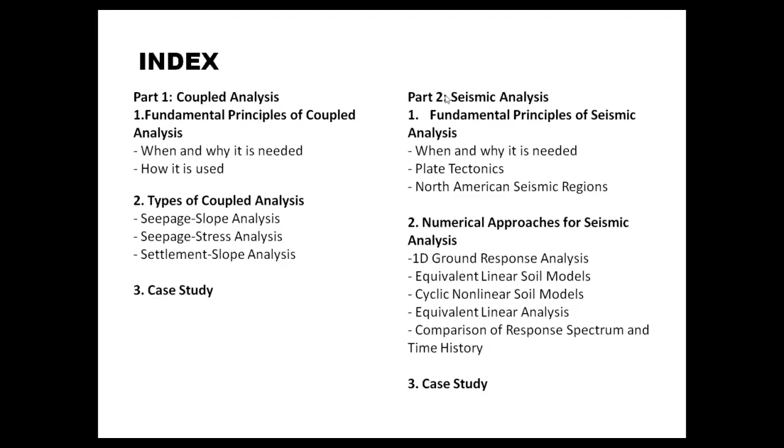In part two, we'll go over approaches for seismic analysis and different methodologies or design approaches that exist for seismic analysis today. This session is a little different from our previous sessions, divided into two main parts. The first part is shorter and covers specifically coupled analysis, and part two covers seismic analysis in detail.

As for part one, here are the main bullet points. I'll give you a basic introduction to the concepts and fundamental principles of coupled analysis, go over various types of coupled analysis that are out there, and then for the last two sections, cover numerical approaches as well as case studies or certain projects that have been done with coupled analysis.

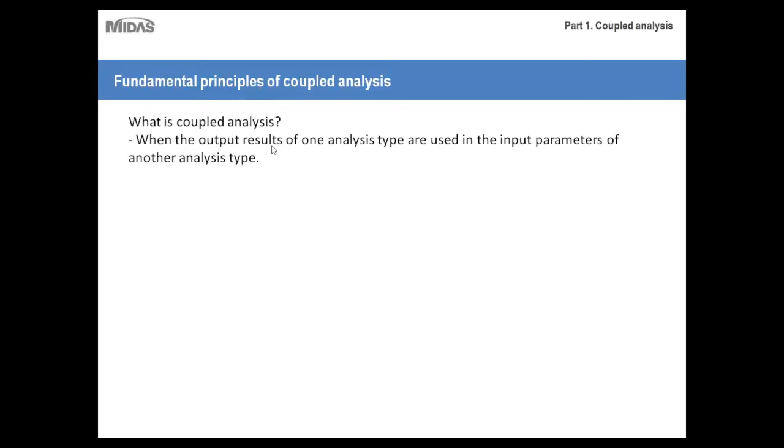So first, what is coupled analysis? Essentially, it's when the output results of one analysis type are used in the input parameters of another analysis type. To give further clarity, it's used for analysis types whose data is analytically interrelated. In other words, the output for one analysis type depends on the results of a previous analysis. I'll go into greater detail about this through some specific examples.

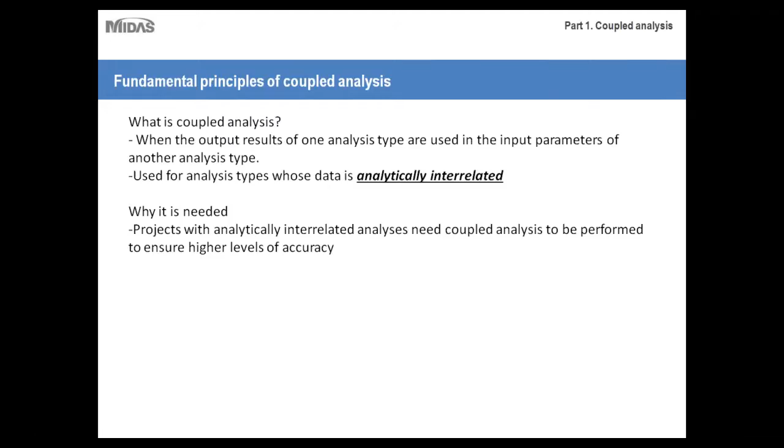So why exactly is it needed? Projects that have analytically interrelated analyses need coupled analysis to be performed to ensure higher levels of accuracy. In other words, there are certain projects that have analysis types that are interrelated. In order to gain fully accurate results, they can't be analyzed independently—they have to be linked together through coupled analysis.

Also, coupled analysis can contribute to designs that are more cost-effective while still meeting necessary design codes. As you all know, the greater your accuracy as far as your design parameters, the more effective you'll be able to design your projects or structures, which in turn can lead to savings in cost as well as still meeting the necessary design codes.

Here's the basic procedure for a coupled analysis. First, you have one analysis type and it's performed. Afterwards, the results from that analysis are imported into the input parameters of the second analysis. Then the second analysis is performed while taking into consideration the calculations produced from the first analysis. So it's a fairly simple process—really a three-step process.

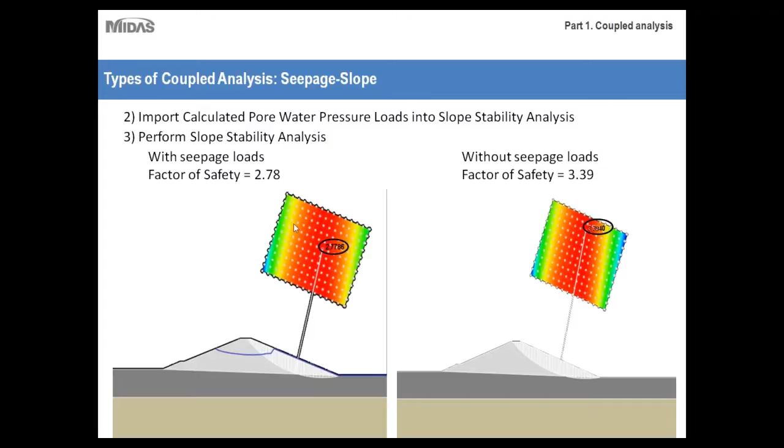Here's another example of our coupled analysis. This would be a seepage stress analysis. Essentially, a seepage stress analysis is first a seepage analysis to analyze the effects of pore water pressure, followed by a stress analysis to analyze the effects of that pore water pressure.

This time instead of a slope, it would be, in this case, an excavation, a retaining wall, a pile foundation, those sorts of structure types.

I'm sure you're all familiar with this equation: effective stress equals the normal stress minus the pore water pressure, and the pore water pressure is calculated just through this simple equation—the height of the water multiplied by the gamma of the water.

But essentially, that's very simple to calculate with smaller scale type projects. As you get into larger scale projects with more complex geometry, coupled analysis becomes more prevalent. It takes a longer process to do, and that in turn makes numerical modeling more prevalent as well.

First, the seepage analysis is done to analyze this flow. Then afterwards, those pore water pressures are imported directly into your soil stress analysis, which in turn would help you to analyze not only your regular stress but your effective stress.

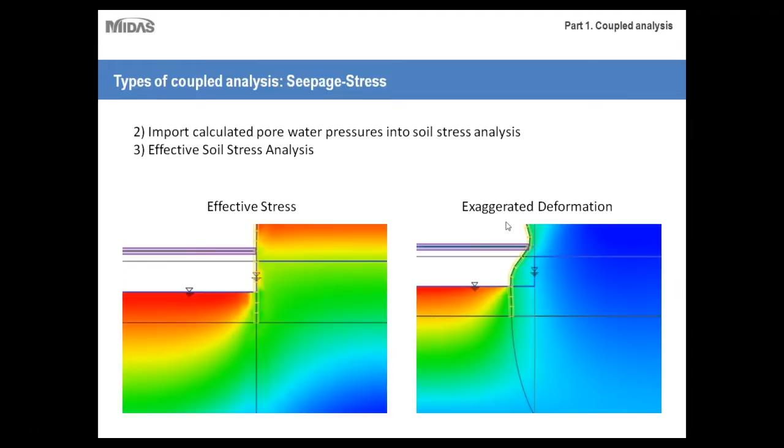As you can see, the effective stresses are clearly shown here, as well as an exaggerated deformation. This is something that the engineer did so that he could get a better view of how that retaining wall would deform and maybe which points would be of most concern to him or her.

Now let's talk about settlement slope analysis. Essentially, the first thing that we need to discuss is just the basic principles of settlement.

I'm sure you're all familiar with consolidation, but just as a recap, essentially what consolidation is: when, for example, you have a clayey soil that's subjected to a certain amount of weight, because the pores in clayey soil are so small, water takes a long time to escape from those pores when weight is pressed upon it. Depending on how resilient or how tightly compacted your clay is, this could take any number of days or even months.

That's another key thing to keep in mind: when clay is consolidated, first it compacts, so there's displacement, and second, the overall strength is increased. Because of these factors, this could affect certain analyses you may need to run for the structure itself, as well as, for example, a slope stability type analysis, which we'll be discussing here.

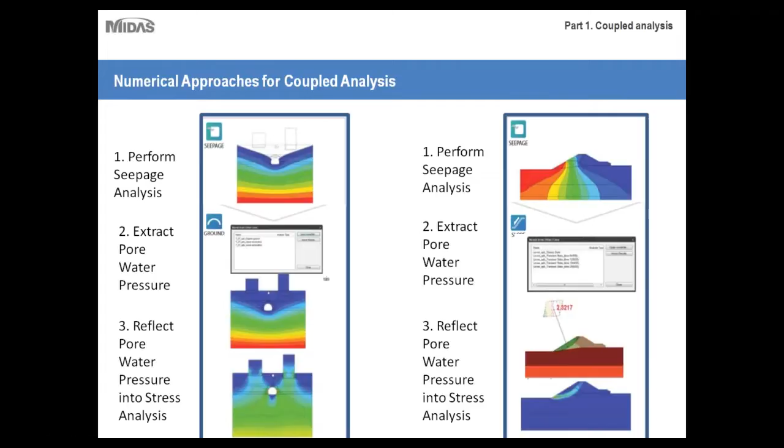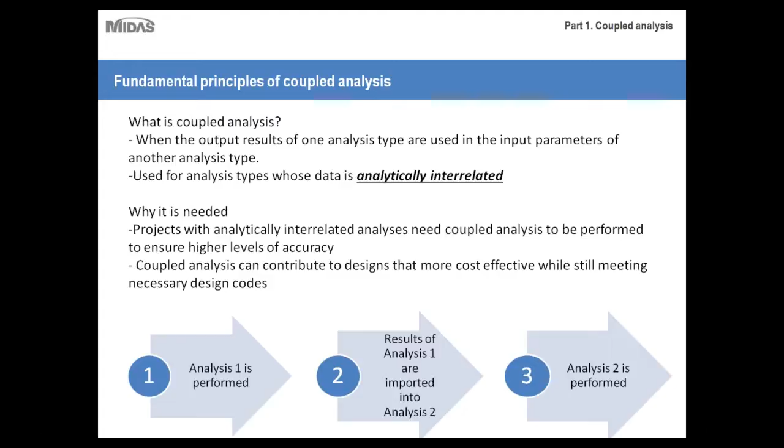Just as a review, keep in mind that coupled analysis is used for analysis types whose analyses are interrelated or analytically interrelated. You need one analysis to be performed before you can successfully or accurately run the other.

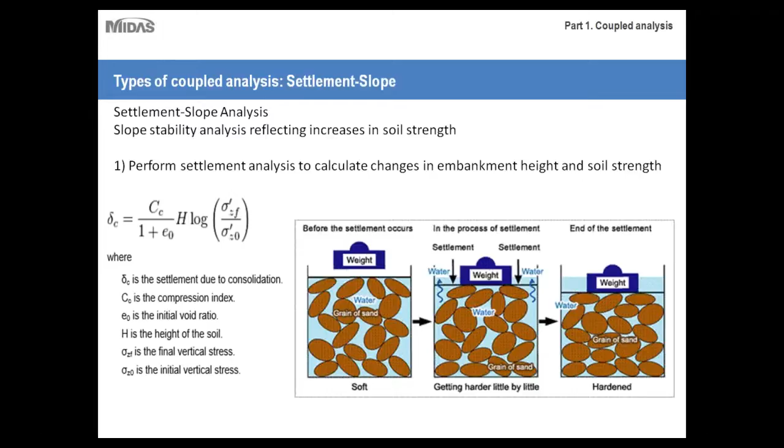As I'm sure you've noticed, coupled analysis is typically used in tandem with seepage and another analysis type, because pore water pressure can have a very strong, critical effect on your project. So pore water pressure loads would have to be calculated through a separate seepage analysis, and then those results would be imported into your following analysis type.

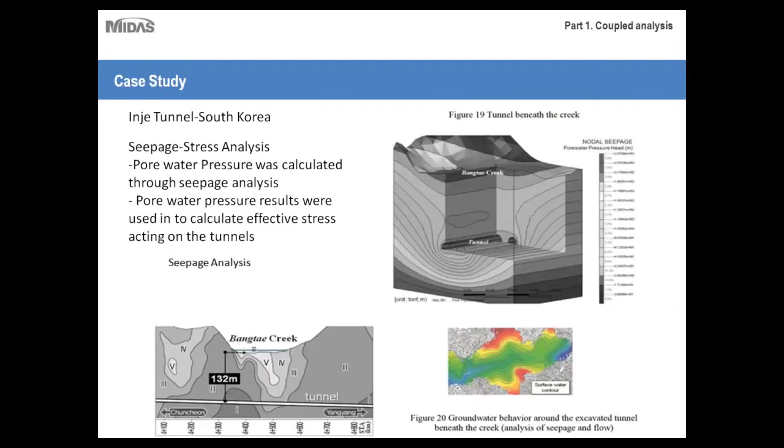Moving on, now we're on to part 2, which will be specifically on seismic analysis. Here I'll go over the very fundamental or basic principles of seismic analysis, numerical approaches for it, as well as a case study.

So first, why is seismic analysis needed? First and foremost, it's a major aspect of structural analysis for high seismic regions, regions such as California, Hawaii, Alaska, etc. Seismic loading patterns are highly concentrated and cyclical, meaning they vary depending on time. Therefore, they cannot be analyzed with numerical approaches used for typical live loads.

The main concept to get from that is that seismic analysis is very unique, and it requires a very special set of calculations in order to effectively consider it in your design. We'll be going over those methodologies shortly.

So why is numerical modeling needed specifically for seismic analysis? Even the simplest seismic analysis methods require consideration of extensive amounts of variables. Because seismic analysis is time dependent, it's cyclical, and it varies very sharply over a very short period of time, a large number of variables needs to be considered to account for that. That's why numerical modeling especially becomes more effective for it, because it can take all those variables and run the calculations much more efficiently than possible by hand in spreadsheets.

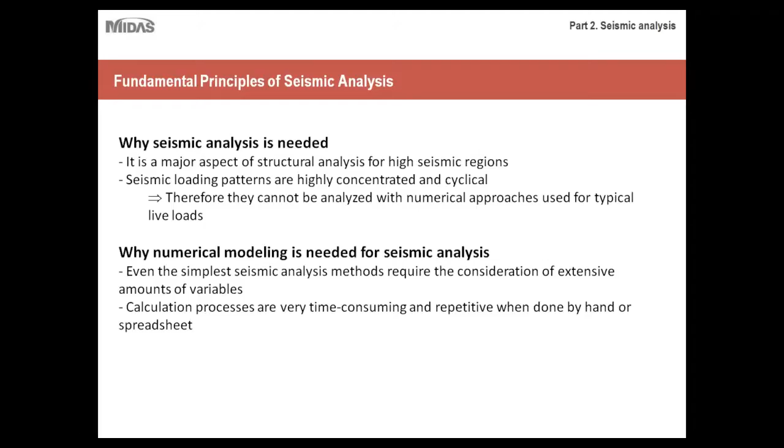As you can see, calculation processes are very time-consuming and repetitive when done by hand or by spreadsheet. So essentially, numerical modeling would help you cut out a lot of legwork as far as seismic analysis. And last but not least, finite element analysis or finite element modeling allows for more accurate and efficient modeling, especially for larger scale projects that require advanced seismic analysis methods.

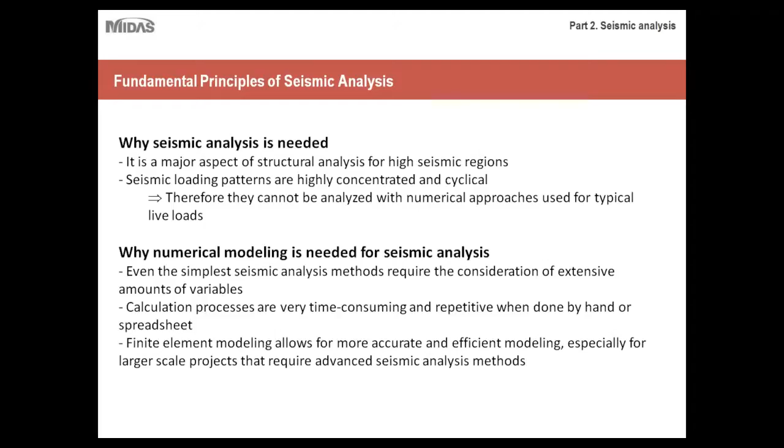So we'll be going over several different analysis methods, but just keep in mind that for larger scale projects in high seismic zones, that have more variables to be taken into account, they require a very high level of seismic analysis, which can only realistically be done through a numerical modeling program. Okay, so before I go too much into detail about seismic analysis itself, first let's talk about the principle of plate tectonics.

So there's the soil layer that we work in as geotechnical engineers, the continental crust. But below that layer, there's the lithosphere, which is very hard rock. Keep in mind that the Earth's surface is made up of several of these large plates. And below the lithosphere, there's a level called the asthenosphere, which is essentially a liquid magma or viscous type material. It's very hot, and what happens is the lithosphere, which is solid, slides along the asthenosphere.

And because these large plates of the lithosphere are sliding very slowly against each other, that leads to a lot of seismic regions in particular parts of the world.

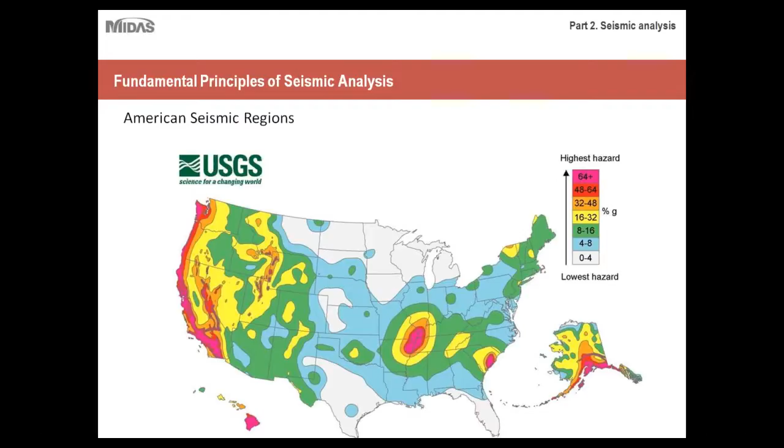You have various landslides that take place. Earthquakes can be a seasonal occurrence, whereas in New York or the Midwest, the seismic analysis calculations or methodologies you use are still there, but not as prevalent - it's not a major part of your calculations. So that's one of the main things to keep in mind: depending on your seismic region or the area in which you work, seismic analysis becomes more prevalent as you go further out west. And as you reach the Midwest or even the Northeast, seismic analysis is still something that's done, but it's not taken into that much consideration because there's less risk there.

Okay, so now let's get into the calculations of seismic analysis itself. First, let's talk about 1D ground response analysis, which is essentially the analysis of how soil responds to cyclic or seismic loading.

As mentioned before, seismic loading is very cyclic. Here we have a time history graph, and as you can see, in a matter of seconds the function goes up and down dozens of times. This is a measure of seismic acceleration versus time. Within just half a minute, you see very high changes in the loading cyclically. So imagine this loading applied to the surface of a building—this can lead to a very unique situation where simple static or live loads wouldn't be able to account for this type of behavior.

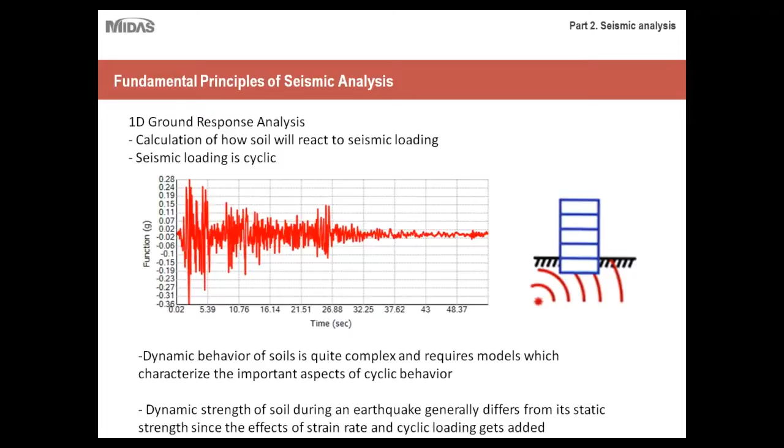The dynamic behavior of soils is quite complex and fairly unpredictable, because no two earthquakes are exactly the same. They require very complex models which characterize the important aspects of cyclic behavior—this back and forth motion, where within a couple of seconds there'll be negative and positive forces acting on the foundation within a very short period of time. The dynamic strength of soil during an earthquake generally differs from its static strength, since the effects of strain rate and cyclic loading get added as well. So keep in mind that the way soil reacts to seismic loading is very unique, and static and typical live loads wouldn't be able to account for that.

As well as the stress-strain relationships—this is also very important. I'm sure you all remember the differences between linear and nonlinear behavior in soil. Typically soil behaves in a nonlinear fashion, so this is very important to take into account when doing seismic analysis. We'll go into both linear and equivalent linear analysis processes for soil as they relate to seismic analysis or seismic loading. Pore water pressure is also very, very important.

Depending on the type of analysis you run—for example, how soil responds to seismic loading when drained versus undrained—the results would be very different. When soil is undrained and seismic loading is applied to it, the soil will actually behave as a liquid in a phenomenon called liquefaction. We won't go into too much detail about liquefaction, as that's a deeper concept requiring its own presentation. But keep in mind that undrained soil conditions combined with seismic loading create a very dangerous and unpredictable environment for your structure.

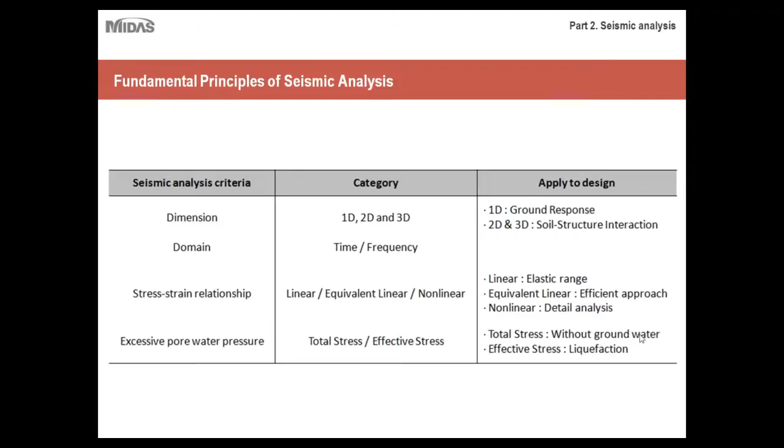But for now, we'll keep it simple and focus mainly on drained analysis. So the analysis procedures we'll discuss will assume that the soil is drained, without groundwater.

Okay, so first we'll go into two main soil models used for seismic analysis. The first is equivalent linear, and I'll go into greater detail about it in the subsequent slide, but first I want to cover its main advantages. Keep in mind that equivalent linear analysis is the simpler and more efficient soil model. It's computationally efficient, meaning you can easily run it through a computer program. It's heavily tested, very widely used because it's so simple, and a variety of different codes are available for it.

So for those of you who have done equivalent linear analysis before, or just basic seismic analysis, this should all just be review for you. It's a very straightforward model, very simple to use, and it's enforced by a lot of codes.

However, it does have several disadvantages. First and foremost, it's not appropriate for very soft soil profiles, so it can't account for deformation, and it can't account for cracking or failure. With equivalent linear analysis, you're assuming that the soil won't deform or have any significant failure. Also, there's significant artificial amplification near fundamental modes.

I'll show you a time history graph later on, but the main point is that with equivalent linear analysis, you're making several assumptions which, depending on the scope of your project, may or may not have a negative effect. Equivalent linear analysis is used for simpler, more straightforward projects, maybe low seismic zones, where these assumptions wouldn't harm your project. Whereas more complex projects in higher seismic zones would require a more complex model, which is the cyclic nonlinear model.

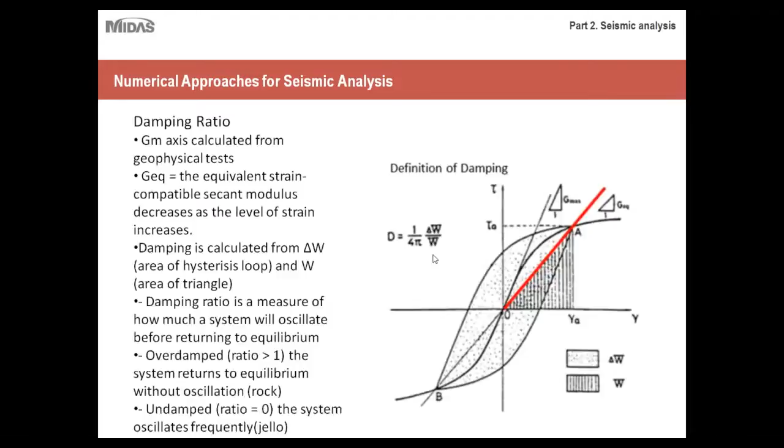In the cyclic nonlinear model, you have an understanding that soil behavior changes as the earthquake progresses. Instead of just using one loop, you have several loops that more accurately define how your soil would respond to seismic loading. You'd be able to extrapolate various values of stress and strain depending on where you are on this loop, and they'd be far more accurate than what you'd have for your equivalent linear model.

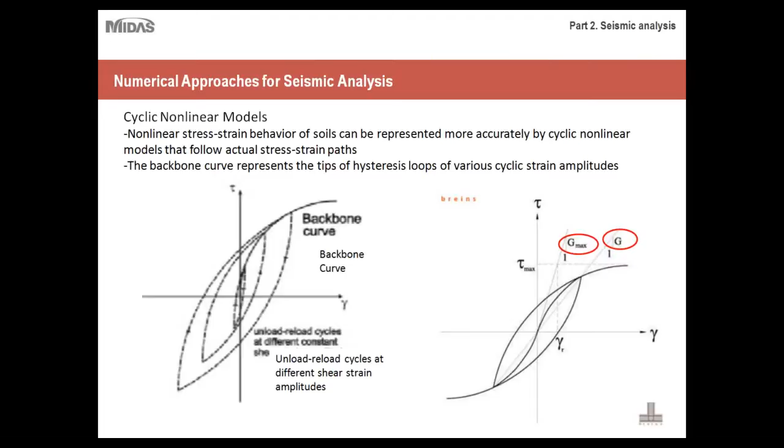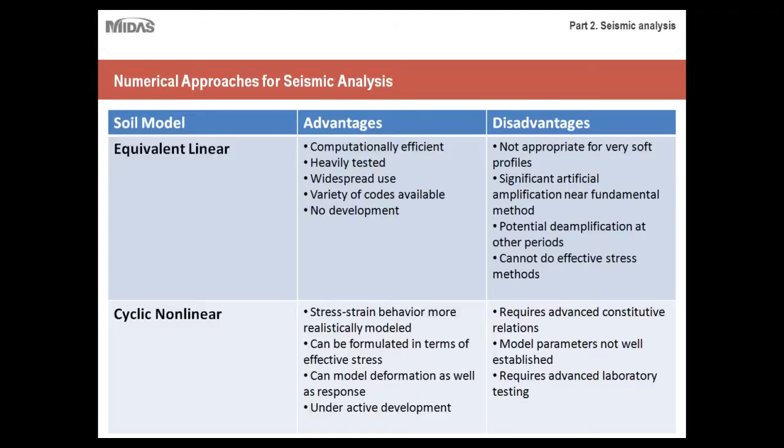Just to review before another quiz: cyclic nonlinear models are used for higher end projects where you have more variables to take into account, so it's more accurate but less efficient. The equivalent linear model requires several assumptions, but it's more efficient computationally and more widely used for smaller scale projects or seismic regions that are away from fault lines.

Reviewing plate tectonics, keep in mind that depending on where you reside on the Earth's surface, if you're closer to a fault line, or where two plates meet, you're in a higher seismic zone, so earthquakes become more prevalent in that area. That's the basic review.

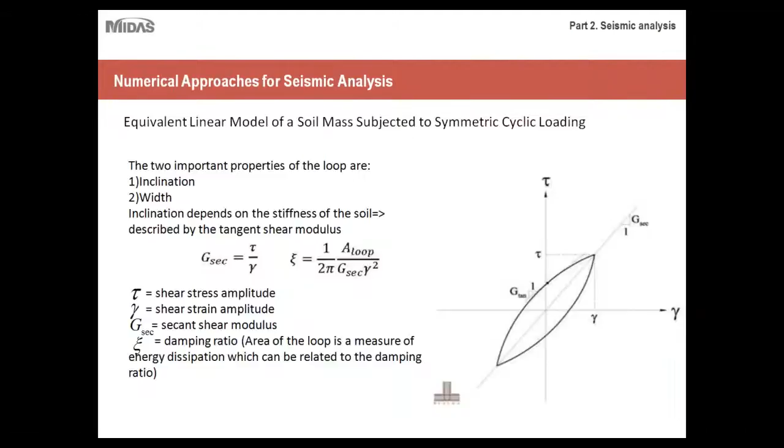Now that we've talked about constitutive models or ground models for seismic loading, let's talk about the analysis used for structural design as well as structure interaction design. First, I'll talk about the most basic type of seismic analysis available, called equivalent linear analysis. It's a good way to remind yourself that equivalent linear analysis corresponds to your equivalent linear constitutive model for soil.

This is the most straightforward and simple seismic analysis type, typically used for smaller scale projects in low seismic zones, and it's defined by your building code. Depending on the region you're in, the code will be enforced, and you can follow a step-by-step procedure on how to model your seismic loading.

Essentially, what you're doing is assuming that the seismic loading follows a distributed loading pattern. For example, for a low-rise building, in order to create your seismic loading, you take a force and model it as a triangular distributed load, which increases the higher you go up, because the farther you get from your foundation, the more flexure you'll experience as you go higher.

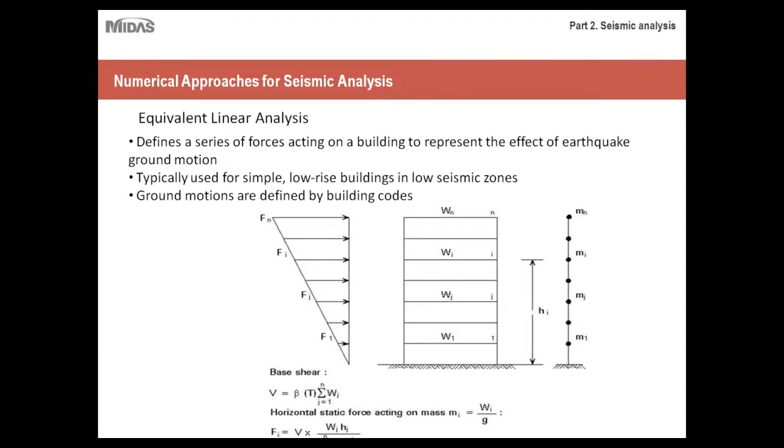Obviously you're making several very large assumptions when doing this type of analysis. But for smaller scale projects in low seismic regions, for example out in the Midwest, or a region in the center of the United States where seismic vibrations are very low, an analysis like this would suffice. That's the first type of analysis available, and for those working in low seismic regions, this should be very familiar and well acquainted.

For more complex or higher end analysis, the first type we'll talk about is response spectrum analysis. It's required by many building codes except for very simple or very complex structures. Of the three analysis types we'll discuss, response spectrum analysis is the most widely used, because for very simple structures you can just use the equivalent linear analysis.

For structures in higher seismic zones, closer to out west, or even in the north here in New York in the Northeast, response spectrum analysis is used quite often because the seismic zone is still a little higher than those in the Midwest or central United States.

Response spectrum analysis is very prevalent in those regions because even though the seismic loading isn't as high as it is, say, in California, it still needs to be taken into account to an extent where a more detailed analysis than equivalent linear is needed. It's sort of the middle ground: if you have a very simple structure in a low seismic region, you use equivalent linear analysis. But if you have one in the middle range, not a very complex structure in a high risk region, but still seismic, and it's a building that isn't low rise, you'd use response spectrum analysis. It's in the middle, and because of that, it's the most widely used.

It's useful when detailed time history records are not available. I'll discuss time history records more later when we cover our final analysis type, but keep in mind that for more complex or higher end analysis, you'll need a time history record, or series of records, which closely detail a series of critical earthquakes in the area where you're building. For example, if you were building in Los Angeles, a very high seismic region, you'd have a whole database of time history records of critical earthquakes that happened over the years, and you'd use those in your analysis. With response spectrum analysis, you don't need these records, you can work without them, which is particularly useful because using and implementing time history records is very time-consuming and detailed.

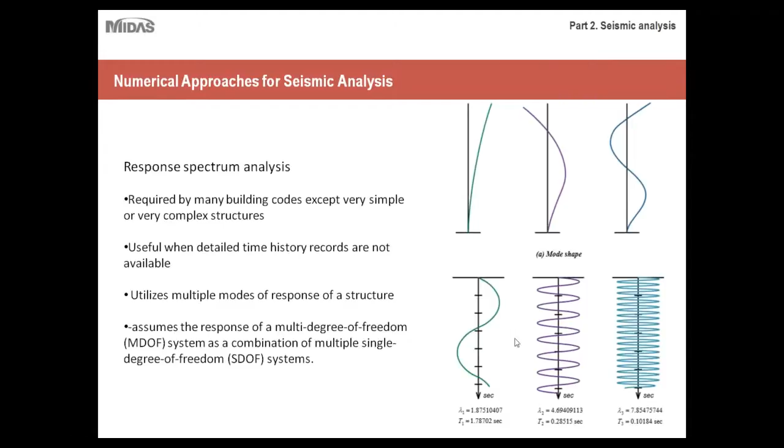Okay, so now let's talk about time history analysis. The main thing to remember about time history analysis is that it's higher-end seismic analysis, and it's performed when detailed evaluation is required or when a complex structure and ground conditions exist.

So I mentioned analysis that's done in California, Washington, Alaska, Hawaii. Most engineers that I'm acquainted with typically deal in time history analysis for almost all of their projects, just because of the high seismic region they're in, and also for larger scale projects built there. Time history analysis is their only realistic way to design for the seismic loading that takes place there. So it takes the most variables into account.

As I discussed before, you'll need access to a number of time history records, and these are standardized. For those of you who work in high seismic regions, I'm sure you're well aware of the time history records available in your area. So you need access to these records, and then you'd have to import them into the calculation itself.

I won't go into very high level of detail because time history analysis, this in and of itself could be its own lecture, just how to go through it. But I just want to help you guys become aware that time history analysis is especially useful for high loading or high seismic conditions.

So it requires more time and effort to perform, obviously, and it requires time history graphs of past earthquakes in the area. Here's the variables taken into account as far as your time history functions: the acceleration, or seismic acceleration of your loading; the forces applied to your structure; the moments; as well as the displacements. And the closer the timing of the steps, the more accurate the solution will be.

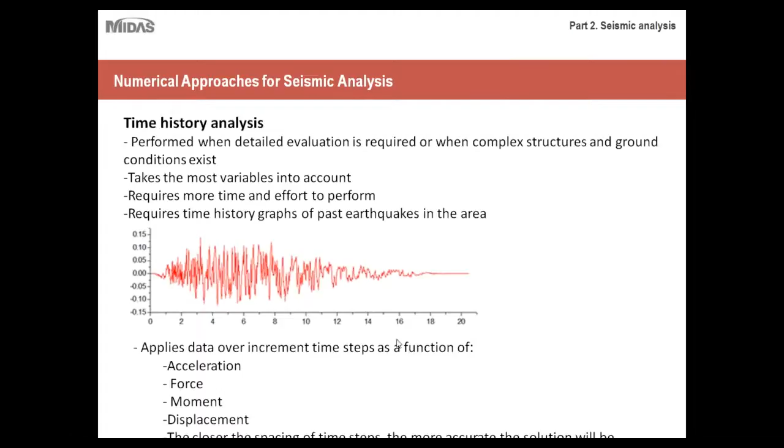So now let's talk about something called soil springs. This is another key factor of time history analysis. Soil springs and time history functions are generated by the geotechnical engineer. So once you have your time history record, it would then be on you to create a time history function as well as soil springs. Essentially, a soil spring is a very special element used in numerical modeling to simulate seismic loading and ground behavior to that seismic loading.

For example, just imagine a bed spring pushed up against a cinder block or a tube. If you were to apply a force to it, that spring would oscillate - try to imagine it that way, that's why they're called springs. So these spring elements take into account the oscillating behavior of how, say for example, you apply a seismic load to this pile foundation - it's going to shake back and forth. So these soil springs would take into account that type of behavior.

And what you'd have to do is create a soil spring for the tips, for the lateral behavior, for torsional behavior, and vertical behavior. As you can see, it's a long process that requires a lot of attention to detail to model all of these springs. Each of these springs, depending on the soil layer and the type of earthquake you're modeling, would have its own time history function associated with it. So that's what makes time history analysis so cumbersome and yet so accurate, because of this level of detail.

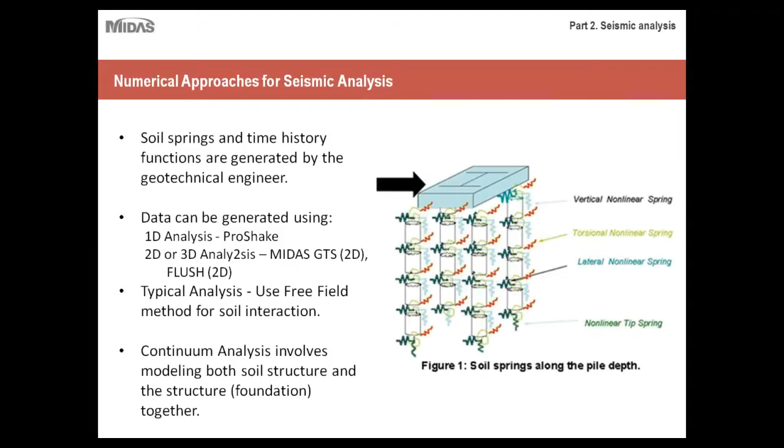A good way to go about learning seismic analysis is first to familiarize yourself with these two methods, and then once you understand the governing principles behind them, you can use ProShake and numerical modeling programs to save you time. But it's always a good rule of thumb to understand the underlying principles, so when inputting parameters for programs like this, you understand what they mean and the calculation process taking place.

Let's talk a little bit more about soil springs. Here we have another example, a 2D example of how soil springs are applied to a drilled shaft. Because the soil varies at these different levels, and also because of different positions of these nodes themselves, each of these soil springs has a different time history function attached to it.

Response spectrum is defined at the rock level rather than at the ground level, as in the response spectrum analysis method.

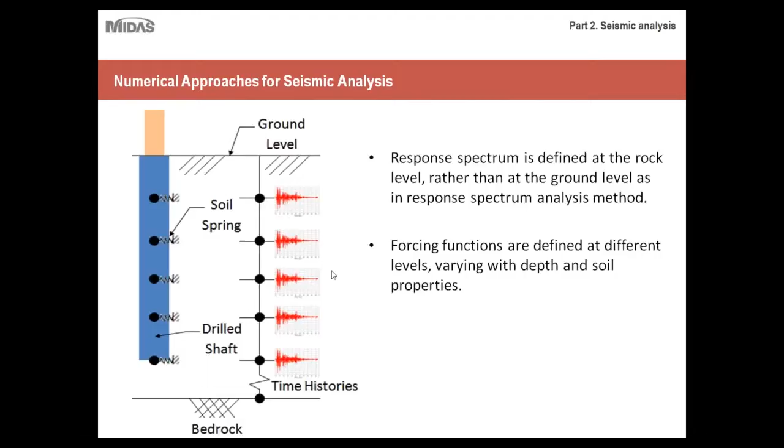Forcing functions are defined at different levels, varying with depth and soil properties. You need such a wide database of time history functions because of the different variations in soil behavior depending on where you're at. So if you have 3 or 5 different soil layers, you'd have a time history function for each of those layers.

Soil springs are defined along the length of the foundation and correspond to the forcing function—either force or displacement, depending on the geotechnical analysis. The forcing function is directly related to your time history analysis.

The main purpose of these soil springs is essentially to model the oscillations in your structure, as well as to model your seismic loading functions on them. These loading functions apply a different seismic loading condition to each of these nodes and springs, and therefore you'd be able to get a much more detailed and accurate analysis.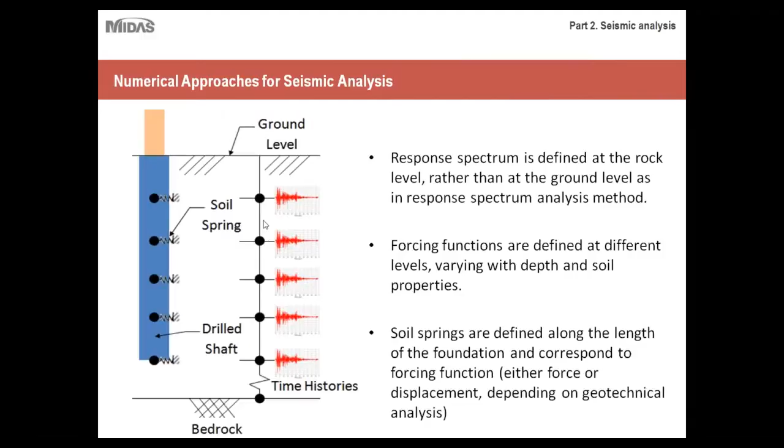Now, how time history data is created. First, a response spectrum at the rock level needs to be created—that's the very first step. At the rock level, engineers or scientists determine how that rock responds to seismic loading. Afterwards, they find accelerations at rock level from various agencies, through site-specific hazard analysis.

For example, if you're working within any one of these regions, there should be a database of different response spectrums for each of those areas. Depending on your area, you just have to go to these various agencies to find the response spectrum that applies to your particular region.

Last, you'd pick an existing acceleration time history that matches the target response spectrum for the project location. You'd have all these time history graphs available to you, and then you just have to pick and choose. This is where it really is up to the engineer to decide which time history functions are best suited for their project.

I won't go into the details of how that decision is made, but keep in mind this is really where the engineer's expertise comes into play, because there's no set guideline that tells you to use this function over that one. It really depends on various factors—the scope of your project, where exactly it's located, how large your project is, etc. Essentially it's up to the engineer to find that database and choose specifically which time history function matches the needs of their project.

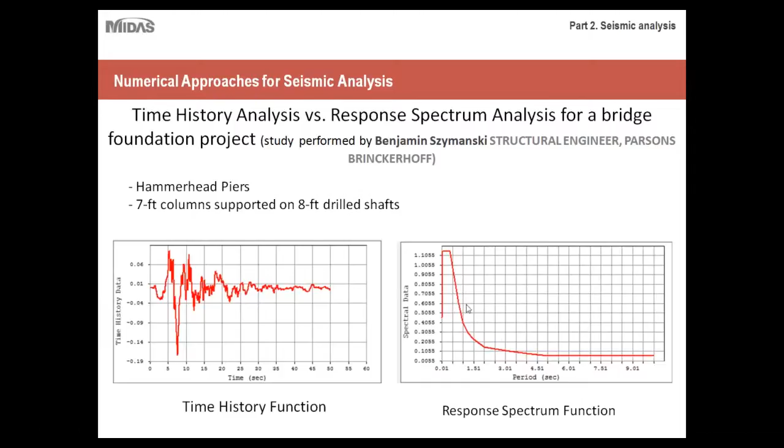So what does this mean? Response spectrum analysis essentially gave you a very conservative result. Because fewer variables are taken into account, the analysis itself has to be conservative in order to be realistically used in the field. With the time history analysis, because it had more variables to take into account, because it was more thorough, it gave this particular engineer moments that were far less.

Using these results, he would be able to create a more optimized design. In other words, if you use your time history analysis, you can say with great confidence that based on these calculations and the simulation just run, these will be the critical moments. You'd be able to have a design that's more optimized and more cost-effective. Ultimately, using time history analysis could help you have bids that were more competitive, depending on your project, because a calculation difference like this could help you create a design that saves maybe thousands of dollars. But it really depends on the project itself.

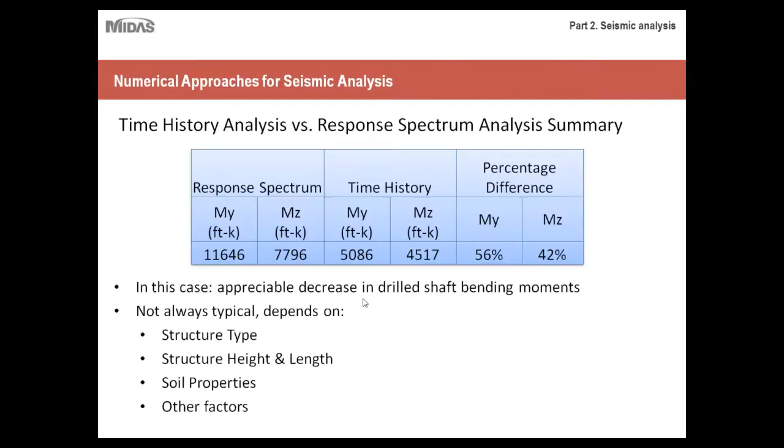Okay, so now we'll just go over, once again, the pros and cons of time history analysis versus response spectrum analysis, just a summary of what we went over.

So the pros of time history analysis: in some cases, it's possible to reduce the level of steel reinforcements and possibly concrete, which would require revising analysis. That's just another way to say that with time history analysis, you can create designs that are more optimal because you have results that are more realistic and less conservative.

Also, it can amount to a considerable cost savings by reducing substructure quantities. This engineer was a bridge engineer, so by reducing the size of substructures like the bridge piers and parts that support the bridge, they can cut costs of the project while still maintaining safety.

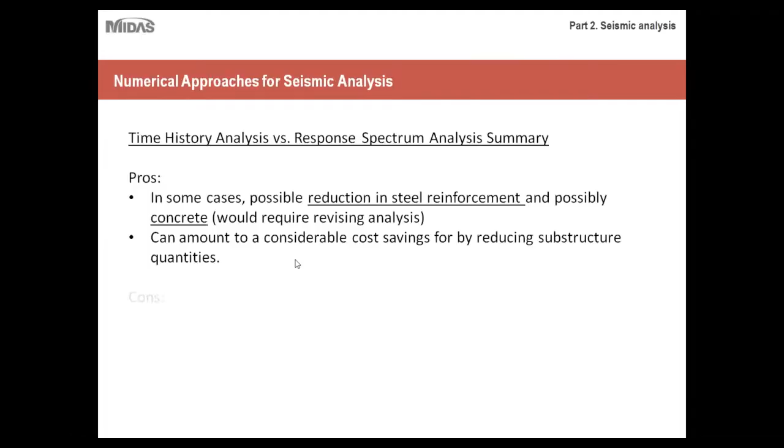Okay, now let's talk about some of the cons of time history analysis. It's not applicable and it's insignificant for conventional type projects. For example, if you were working on maybe just a regular building in the Midwest, time history analysis wouldn't be realistic for you to run, and would be too much of a time investment, when you'd be able to achieve results that are completely acceptable with response spectrum analysis.

And then it's time consuming and requires a significant amount of computing power to handle all of the data. That's where numerical modeling programs come into account. Even though you can save a lot of time with numerical modeling programs, time history analysis in and of itself is still a very lengthy process.

So if you decide to go with time history analysis, make sure first and foremost, one, that it's worth the investment, and two, that you're properly equipped to handle it. If you don't have a numerical modeling program, it's really not realistic to do time history analysis, because all engineers, especially out on the West Coast, have numerical modeling programs very specific to seismic analysis to help them save on the time they invest in it, because time history analysis is just so prevalent there. So those are the two things to keep in mind: one, make sure that you actually need it, and two, make sure that you're equipped to handle it if you do.

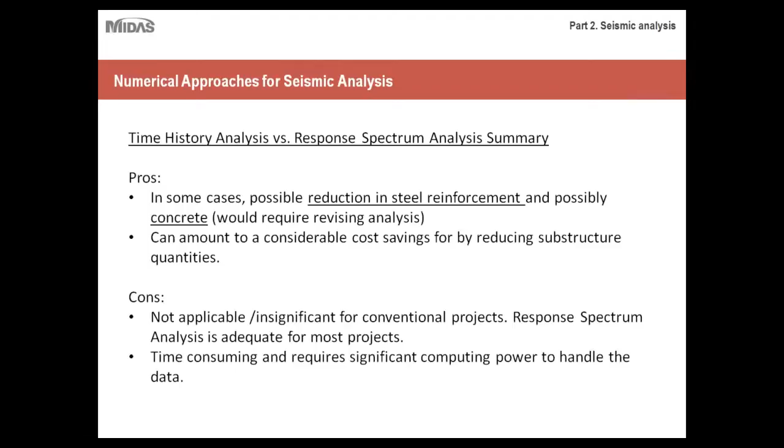Okay, so that's just quiz 3. I think we can just go to the quiz without a recap. All the principles are pretty straightforward. So we'll have another 5-minute quiz, and then I'll do a quick case study, and then we'll wrap up. Once again, this is just another 3-question quiz. You'll have up to 5 minutes.

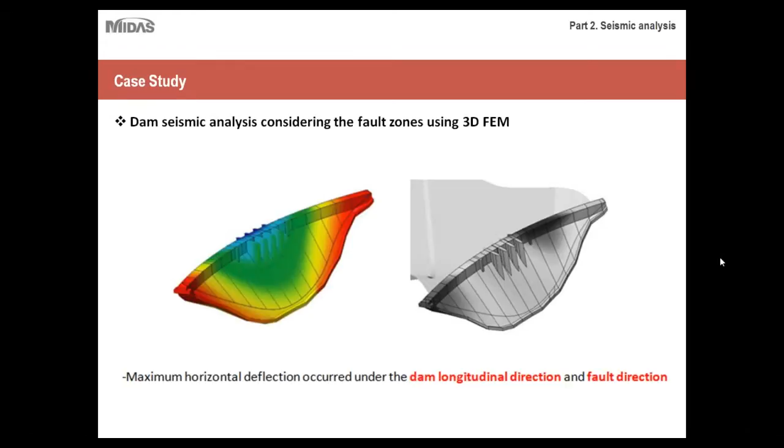So I hope you all found this presentation useful. If you have any questions, feel free to contact me through an email or by phone.